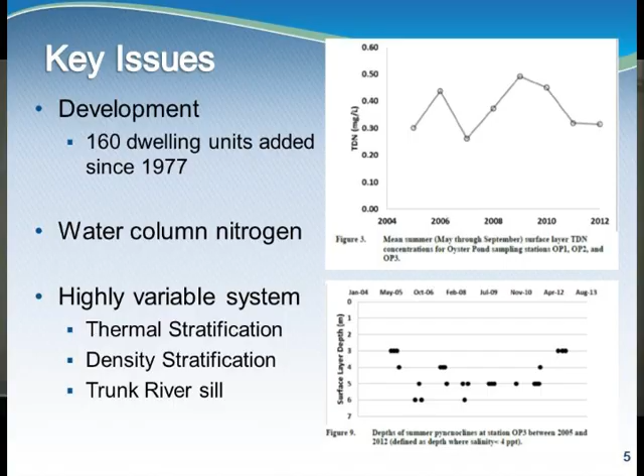Because it's occasionally backflooded by the ocean, it also stratifies by density. So you have a bottom layer that's got basically ocean water, then a diffuse layer that's brackish, and then something at the top that's less brackish. It varies quite a bit, from as shallow as 3 meters down to nothing, basically no stratification if it's shown at 6 meters. It'll go up and down through the seasons of the year, as a function of the environment, the temperatures, and the trunk river itself, which has a hydraulic impact on how water flows in and out of the pond. So it's not a typical estuary.

This is a figure from the needs assessment, and it shows the teardrop shape of the oyster pond watershed. That was established by the MEP, and it's essentially the groundwater recharge watershed. So what goes into the ground, generally within that area, is considered part of this watershed.

166 developed parcels, 225 dwelling units developed. That produces about 29,000 gallons a day of wastewater, which all makes its way eventually into the pond.

We worked with the planning department and the oyster pond working group to look at future flows based on development within undeveloped parcels in the watershed, and projected 19% growth over the planning horizon, through 2040. That increases the wastewater flow to almost 35,000 gallons a day in a do-nothing approach. So that'll make the problem worse.

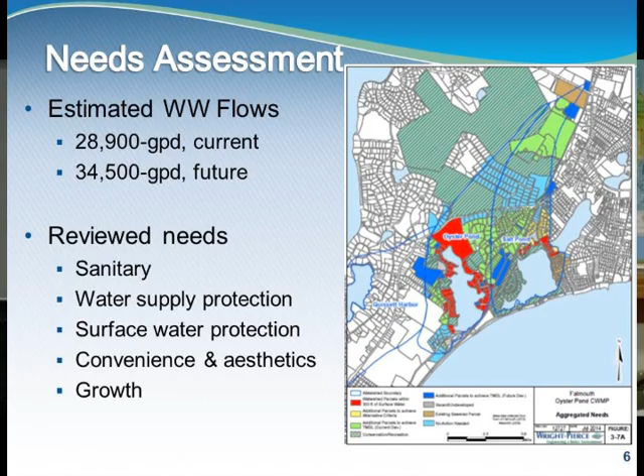We then reviewed the various needs in 5 categories. We look at sanitary needs, which is effluent bubbling out of the ground from leach fields that have failed. Water supply protection, are there any public or private water supplies in the area? Surface water protection from nutrient enrichment. Convenience and aesthetics, which are things like mounted systems or tight tanks. And then growth, as I mentioned previously.

The conclusion from that analysis was that the only real driver in this watershed is protection of surface water from nutrient enrichment. So that's what we focused on for alternatives.

The present load, as determined by the MEP, is 5.2 kilograms per day of nitrogen to the water body. That's based on data from 2001 to 2004, when the MEP collected all their data. It's broken down, and about 72% of that comes from septic systems, 28% comes from everything else: stormwater, fertilizers, land use, forested areas.

The TMDL is substantially lower than that, 1.44 kilograms per day. So there's an awful lot of nitrogen coming into the water body today that needs to be removed, and any growth that happens also needs to be removed because it's by definition greater than TMDL.

One of the keys to our approach was to make sure we addressed this problem holistically, not just focusing on the wastewater, but recognizing that we can still do something about the 28% that's coming from non-wastewater. To illustrate that, if you ignored the non-wastewater components, you'd have to remove 77% of the nitrogen to hit the TMDL. But we looked at different amounts of reasonable removal of the non-wastewater components.

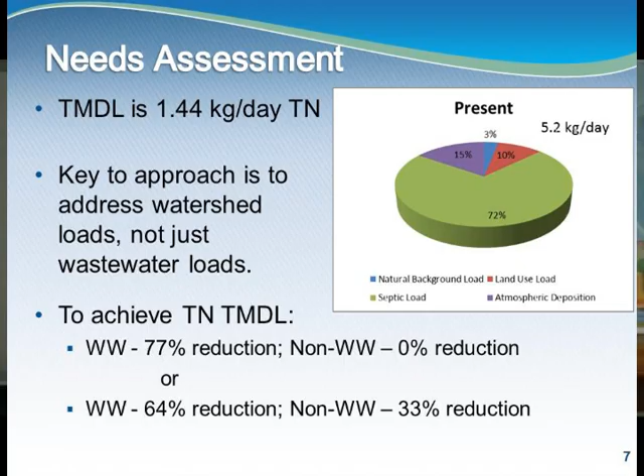In terms of alternatives, we identified 32 different technologies and approaches, or tools in the tool bag. We categorized them by non-structural or structural, something you would maybe legislate or recommend versus build. Source control versus remediation, which would be sewering a house because you're dealing with the source, versus a PRB, which is remediation.

It's already in the groundwater and you're cleaning it on its way through the system. We looked at on-site versus off-site treatment, your backyard system versus an off-site treatment plant, whether or not we address nitrogen or phosphorus or both. Phosphorus is also a driver because the pond acts a bit like a freshwater pond, so we have to be concerned about both nutrients in this case. And lastly, and most importantly, is whether or not the technology is currently DEP approved.

There's a lot of approaches being seriously considered right now on the Cape because of the significant costs associated with cleaning up the estuaries. But there are some things being considered more seriously than others, and some that have demonstration projects implemented, and others that are just being talked about. So we tried to have a sense for that as well.

So I'm going to go through each of the alternatives so people know what we looked at and why. Zoning modifications and growth management would be one way to deal with that growth, that 19% growth, and the cost that comes with it. The conclusion from the working group was recently passed flow neutral regulation, which was required to get DEP 0% financing, is sufficient for this watershed. So there may be opportunities for conservation easements in the watershed, but it's not something that's going to be required or incorporated directly into the plan.

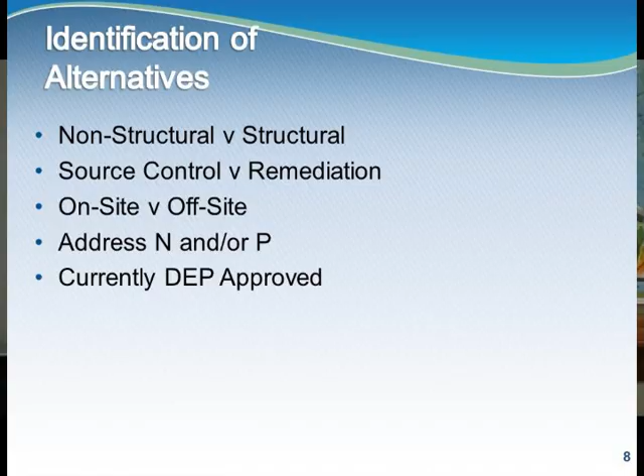Garbage grinders send excess nitrogen out to the septic system that doesn't really need to go there. Falmouth has a garbage grinder ban that's applicable to some elements of development, and the Board of Health is going to consider whether to expand that, to make that more prevalent for new construction and rehabilitation of systems. Septic system maintenance is another good thing to do to preserve the life of your system. It does not remove nitrogen. Pumping your septic tank doesn't remove nitrogen, but it does preserve the life of the system, and is, again, a good thing to do.

And then also there's a body of evidence suggesting that atmospheric sources of nitrogen have reduced fairly dramatically since the Clean Air Act was implemented in 1991. At that point, there were fairly uncontrolled discharges of all sorts of air emissions to the atmosphere. One of the unanticipated benefits that came out of that is nitrogen sources have been sort of polished out of the atmosphere as well. It's definitely one thing to keep track of. The town has asked the county commission to establish an atmospheric monitoring station on the Cape in order to really quantify this.

The projections are, it's been reduced 20 to 30% since the 90s, and there's another 20 or 30% expected based on additional refinements from air pollution control as well as mobile sources like cars. So this is an important thing that, again, doesn't involve infrastructure that we need to put in place here, but helps the long term.

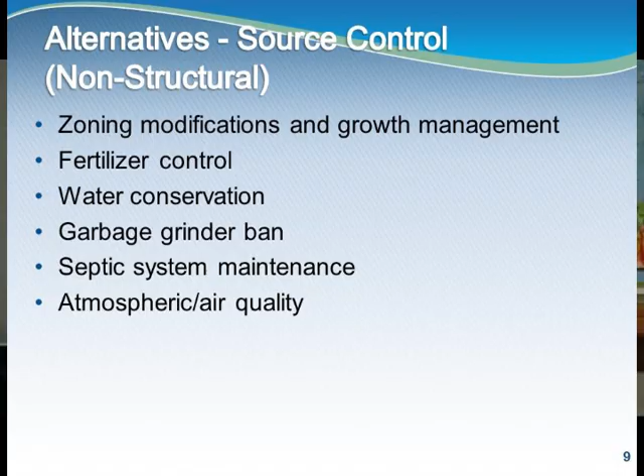From a structural perspective, source control, obviously we want to deal with stormwater and put BMPs, best management practices, in place. That's street cleaning, better catch basin systems, putting in rain gardens, things like that. And then looking at wastewater-related source control. As a part of this analysis, we looked at how we would collect wastewater, and concluded that a small, quote-unquote, small pipe system is the way to go, not conventional gravity sewers, wherever it's needed. We looked at various on-site methods, off-site, which I'll talk about in a bit, as well as effluent disposal.

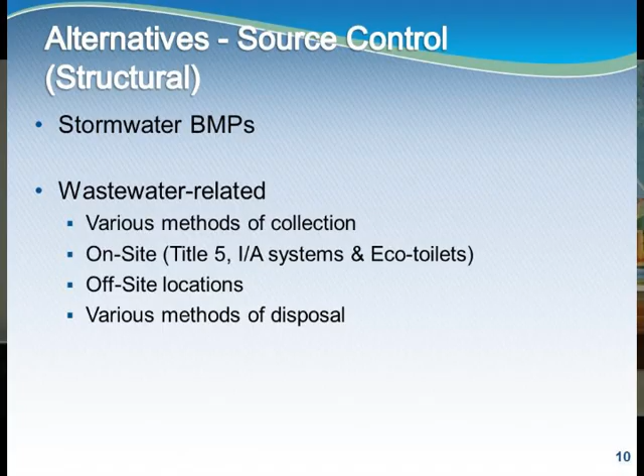So an on-site system, typical backyard system, what leaves the house is about 60 milligrams per liter of nitrogen. And a typical septic system will remove some amount of that nitrogen, 42%, typical, roughly. But in terms of what MEP cares about, the TMDL is based on the rest of the removal. That septic system is the baseline. So if you call a contractor and say, I want to put in an IA system, and they tell you they can remove 70% of the nitrogen, you need to ask, where am I dividing by? Because what we need to care about is how much better does it perform than a standard system.

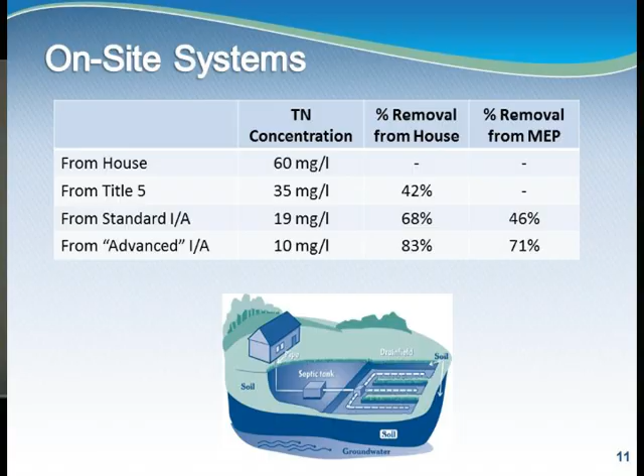So a traditional IA system, a denitrifying system on somebody's property, might remove 70% of the nitrogen from the house, but it's really only contributing 50% removal to our goal, to remove excess nitrogen. And obviously, if you can get a system that produces even better nitrogen removal, better effluent quality, then you're removing even more. IA stands for? Sorry, it's Innovative Alternative System. For Cape Cod, that basically means denitrifying septic system. Is it biologic or physical? Biological.

So we have off-site approaches that we've considered. One is that wastewater that needs to be collected would be sent to one of three places. One could be the Blacksmith Shop Road treatment plant that is built and operational in Falmouth, publicly owned. A second option would be Woods Hole Oceanographic right down the street.

The Quissett campus has its own private treatment plant for their own needs, but it's significantly closer and maybe an opportunity for public-private partnership. Both of those are outside the watershed, so those amount to 100% removal of nitrogen from anybody that's connected. And then the third alternative would be to build something small, a decentralized cluster satellite system in the watershed, and then dispose of the treated effluent in the watershed.

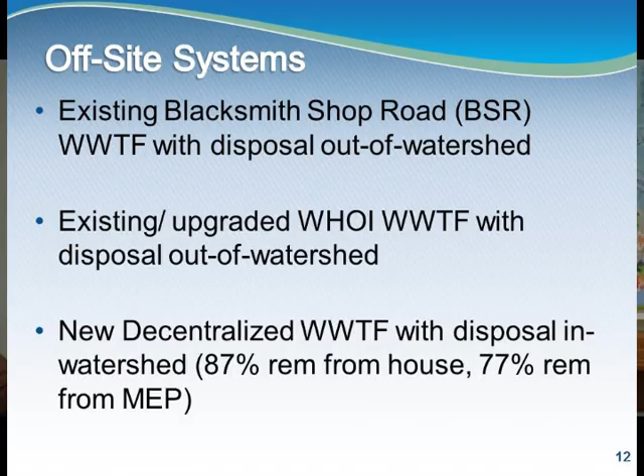This is a condo development on the North Shore in Hudson, Mass, 10,000 gallons a day. Everything's below grade in a little building. This is the Community of Jesus in Orleans. It's built inside something that looks a lot like the neighbor's house, probably. And then we're not considering something that looks like that. That's just to be clear.

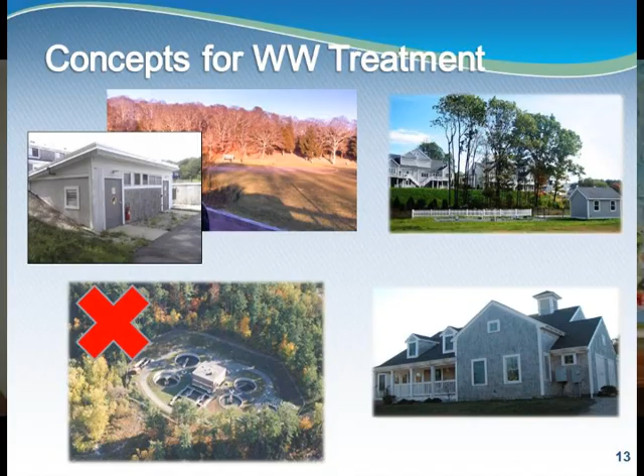By definition, if you're dealing with wastewater off-site, you have to find sites to put treatment or disposal or both. So we looked at aerial mapping and everything that was within 4,000 feet of the pond itself and said, what's not developed, what's publicly owned, privately owned. We came up with 10 locations that were suitable given the size needs. Of those, a couple we had to throw out because of environmental receptors. But there are some candidates, but obviously there are issues.

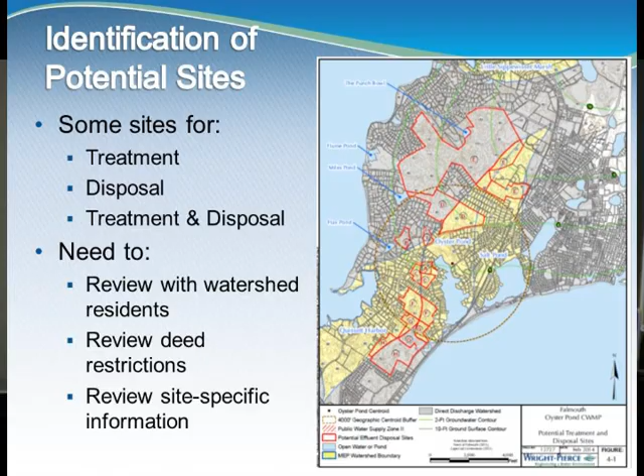They're not publicly owned in most cases, so there's some easement and negotiation issues that would have to happen. We would need site-specific information, we'd need to talk to those property owners and review deed restrictions in some cases to see if it's even feasible. So those are some potential issues related to sites. And another thing, we were very clear about what was on the table and what wasn't on the table in terms of effluent disposal.

So we're talking subsurface again, either something that's called drip dispersal, which is tubing, or subsurface leaching, which looks like the ball field at the Woods Hole facility, or something that's called a wick, which is about as big as this table, and it looks a lot like a manhole cover, not extensive, and it's definitely not open sand beds like you see in Hyannis. That is again not on the table at all for this watershed.

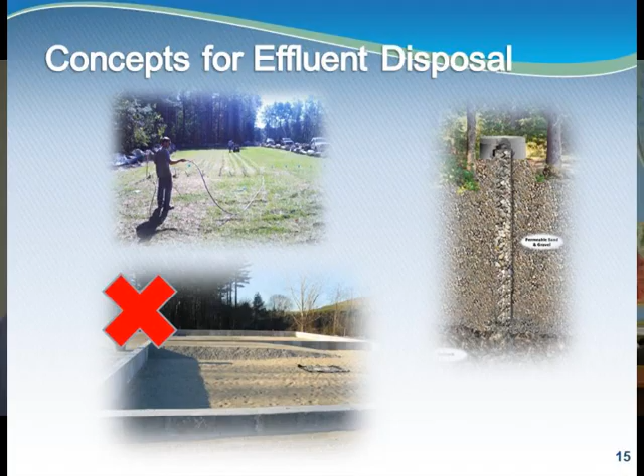We actually hit on most of these in your discussion in Q&A, but in terms of alternatives on the remediation side, so now we're not talking source control, we're talking cleaning it up once it's already in the environment. PRBs, we already talked about. Aquaculture is sort of the bigger name for either growing shellfish or growing algae, to use the nutrients as a food source and then take out the biomass, essentially. Shellfish isn't going to work in Oyster Pond because it's brackish, and algae growth.

I can ask it later. Okay. My question was basically, back in the 1700s, that water was able to sustain oysters. What would be wrong with bringing it back so that it could? I'll come back to that, because that's like one of the next ones, and it actually is the next one here.

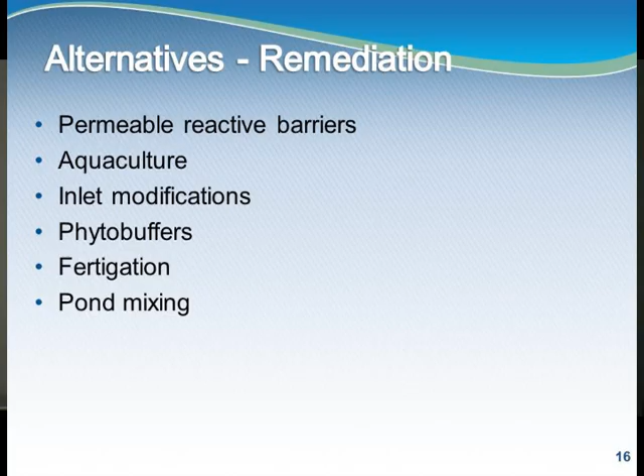So algae is one of the, I mentioned that there are some things that DEP is seriously considering as alternatives and demonstration projects, and some that they're probably not really considering seriously. And I would put algae aquaculture in that category. So the commission and DEP are developing what's called the 208 plan update right now, which you may have heard about. It's due to be published at some point in the fall, and will speak probably specifically as to whether that's a viable alternative here or anywhere.

Which commission, and then, like the DEP, is that the state or federal? DEP is state, Massachusetts DEP. There's EPA, which is the U.S. Environmental Protection Agency, that's federal. Massachusetts DEP is the state department that's in charge of environmental quality. And then there's the Cape Cod Commission, who does a lot of things, but one of their charges is to deal with the 208 plan, regional wastewater management,

discussions, and nitrogen management. And the fourth entity would be MEPA, which is the Massachusetts Environmental Policy Act office, that is sort of the environmental clearinghouse for any proposed project, whether it's a shopping mall or wastewater infrastructure.

So shellfishing wouldn't work here because it's brackish. Inlet modifications is something that's being done in town, on the south coast, Bourne's Pond, right? So it's opening up a water body to better tidal communication, so it flushes much more frequently. It's not something that we considered here because this pond has been managed as a brackish pond for, I guess, 12, 15 years.

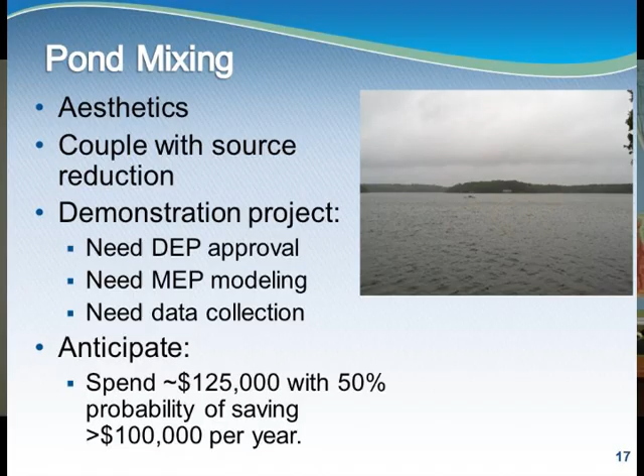So this mixer is solar powered. It's basically a propeller. It's like an old-fashioned wall fan, except horizontal, like a ceiling fan, that pulls water up from the bottom from a pretty discrete interval of the pond, and it's above that stratified layer, and it pulls from only about an 18 to 24 inch zone. It brings it up the column, spreads it across the top, and it just circulates this way.

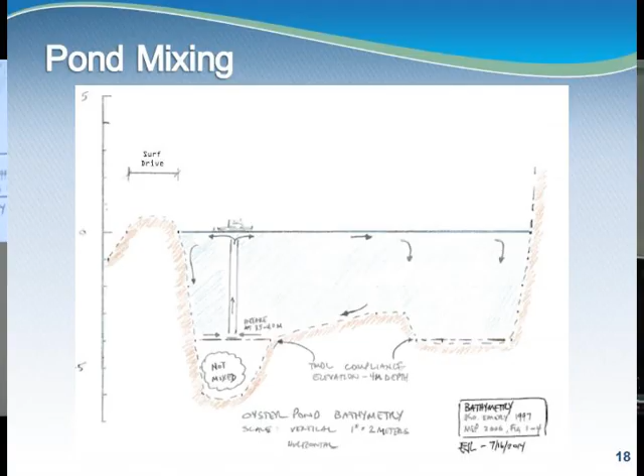We know the pond is well mixed horizontally, but we also know that it's not well mixed vertically. So we're not talking about a lot of mixers, we're talking about one, pulling from a fairly discrete area at the bottom, and the goal of it is to keep the stratification below the compliance elevation, which is what's defined in the TMDL. Okay.

So we have some baseline alternatives and some baseline measures and alternative measures. The baseline are the ones that are going to be part of every plan, and it's all the non-structural source controls, periodic maintenance, dredging of the trunk river itself, and then stormwater best management practices.

Alternatives are things that we may consider based on further discussion and analysis. Those are changing water quality criteria, implementing pond mixing, modifying what we call pond compliance elevation, that's dealing with the dynamic fluctuation of the stratification layer, whether or not it makes sense to implement fertigation or phytobuffers, and whether or not it makes sense to establish a watershed district to help manage the costs and manage water quality. So the may consider items are for future discussion.

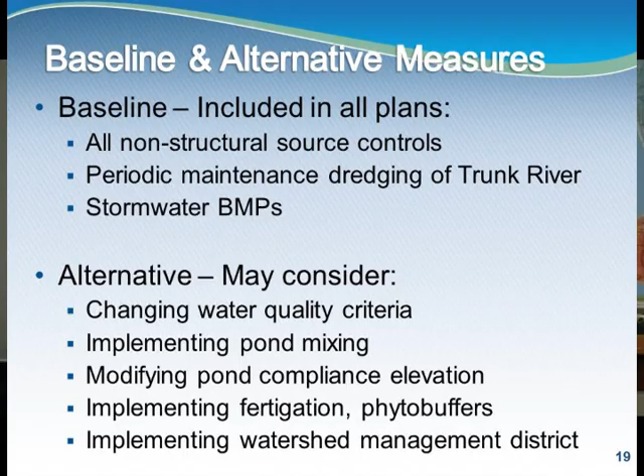So we're taking the baseline measures, the alternative measures, and we came up with 6 what we call composite plans, which looks at how to address compliance at the planning horizon with the TMDL. So these include growth. And they range from sewering to the Blacksmith Shop Road treatment plant to no action.

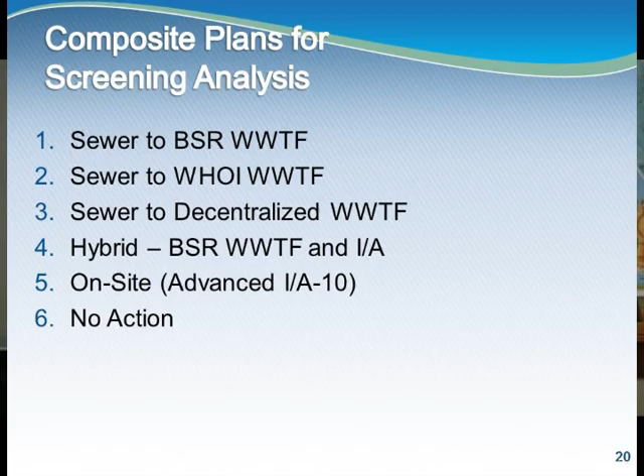So, Plan 1 is to sewer 70% of the dwelling units, send that out of the watershed to Blacksmith Shop Road. So the 70% is of the future developed dwelling units, okay? So that would meet the TMDL, which is nitrogen. It would produce significant phosphorus removal, which is an important characteristic here. It reduces freshwater recharge to the pond a little bit, not a lot, 4%. It would send about 26,000 gallons per day to the Blacksmith Shop Road treatment plant.

One of the big issues here is whether or not that plant actually has capacity. And that's something that I don't believe will be known until some point next year. And it's related to the permit and EPA and its discharge, West Falmouth Harbor discharge capacity. Yep. Okay.

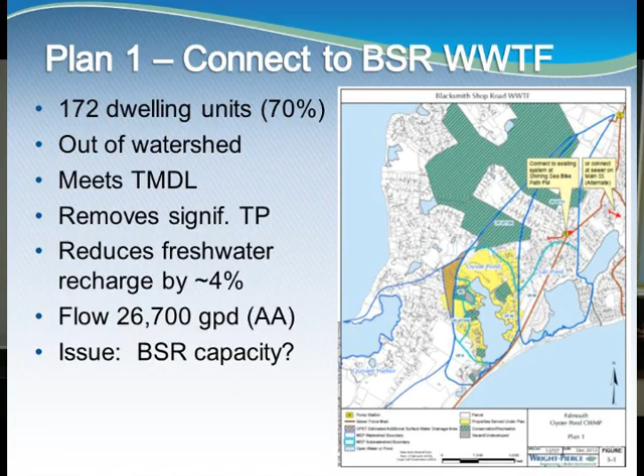Plan 2 is pretty similar, except that instead of going to North Falmouth, we're going to go down the street to the Woods Hole treatment facility. Because we're taking wastewater out of the watershed, it meets the TMDL, same amount of phosphorus, same amount of freshwater recharge reduction. But we know WHOI's not super interested in this idea because they have their own growth plans long-term. So public-private partnerships are a lot like pushing rope, so maybe that could happen.

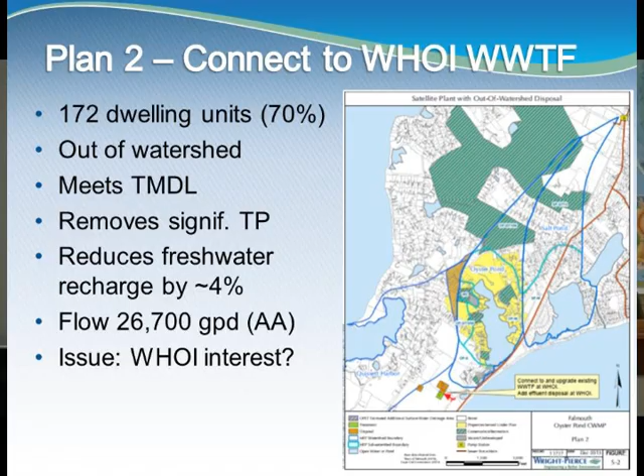Plan 3 would be to build the low-profile, fitting in the neighborhood type small treatment plant in the watershed, and then disposing of that in the watershed. It would be 87% of the dwelling units in the watershed. It would meet the TMDL. It would remove significant phosphorus. No change in freshwater recharge because you're putting it all back in the same place. And then the question would be, where of the 8 remaining places do you put it? What fits in best? Whose neighbors are louder than the other people's neighbors? So there'd be lots of fun associated with that.

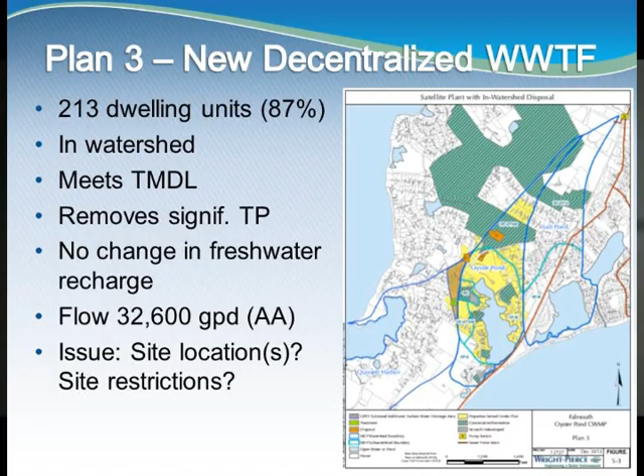Plan 4 is a hybrid plan, and this came about from comments and discussions at the June Water Quality Management Committee meeting. So this is different if you were there last time. So this is sewering properties at the north end of the pond and sending that to Blacksmith Shop Road. And then letting, over time, the rest of these homes in the watershed convert to IA systems based on building permits or system failure, Board of Health type permitting.

So it would impact 94% of the homes in the watershed. 112 would be sewered, 117 would be IA systems over time. It meets the TMDL, removes a little less phosphorus, a little less freshwater recharge change, takes less capacity wherever you send it, and it's got the same issue with Blacksmith Shop Road.

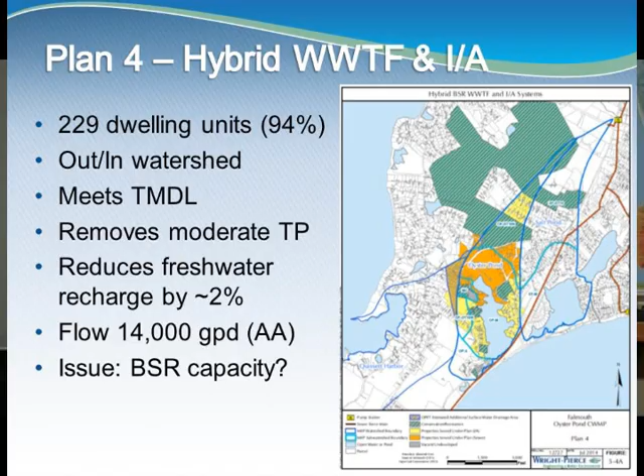So Plan 5 is not a hybrid plan, it's all on site. So everybody addresses nitrogen in their own way on their own property. This would impact 94% of the homes in the watershed. And the reason is that Oyster Pond South doesn't contribute to water quality in the pond, based on MEP's modeling.

So it's an in-watershed, meets the TMDL, no change in freshwater recharge. The bigger issue is the math doesn't work if you get past the planning horizon. You have to then change course and take water out of the watershed, 2040 and out. So it might make more important conservation restrictions or conservation easements at some point in the future.

And then systems that DEP would approve that meet 10 or less, there's a fairly limited set of options. So you're not talking 10 different manufacturers you could buy something from, you might be down to 2. So there are issues there. I expect over time that will change as this topic matures on Cape Cod.

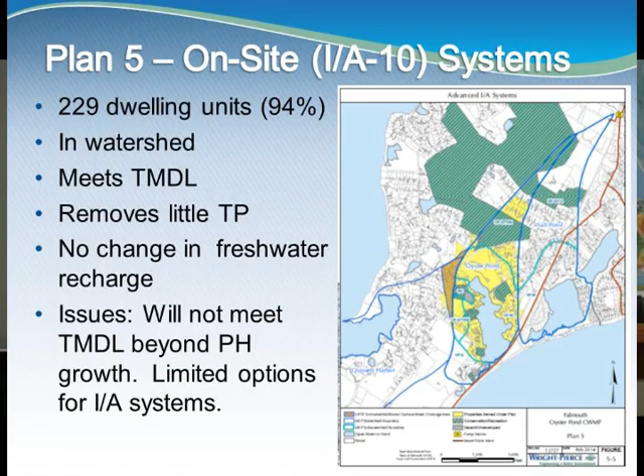Plan 6 is no action, and it doesn't do a lot. But one thing that's interesting though, if people don't think about this all the time, is that there's still a cost associated with that, because people are pumping their septic systems, and whether or not you budget $900 a year to replace your system in 20 years or not, that's an actual cost. Most people just write the check or get a loan or something when it happens, but there's a cost associated with that.

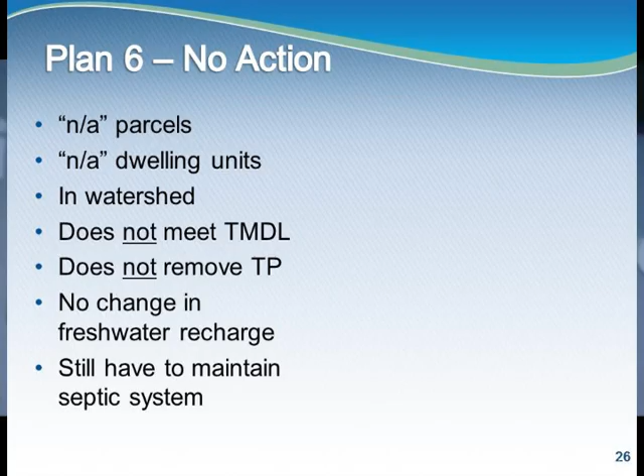Principal differences: all the plans except the no action plan meet the TMDL. Some of the plans involve sewers, some don't. Some remove wastewater from the watershed, others don't. And some of them remove significant phosphorus, whereas others remove only a little or none. So those are all kind of things that might tip the balance.

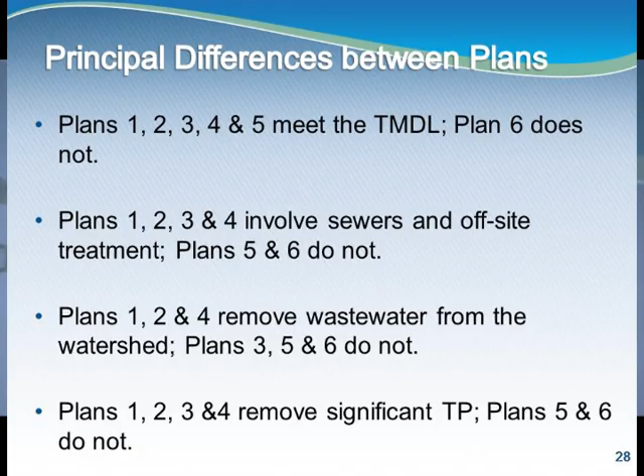We developed costs for each of these 6 options, and we did that by coming up with conceptual layouts, where would sewers go, how many, and doing the nitrogen budget. How much do we have to go get from a property, from a dwelling unit parcel perspective, for current and future conditions. We use capital and O&M costs from the Barnstable County Cost Report, which the Cape Cod Commission published in 2010, for treatment plant costs and I/A system costs.

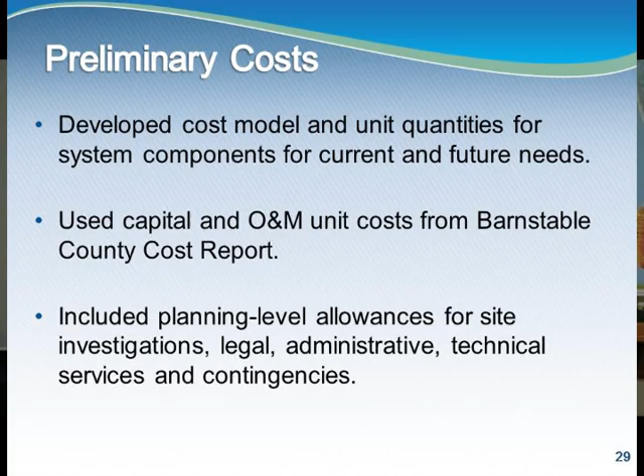We developed some other costs for things that aren't in that report, like sewer systems, pipes, the cost for effluent disposal. We developed those ourselves based on experience. And then we included allowances for the things that are part of every project, legal, technical, administrative, site investigations to find appropriate sites.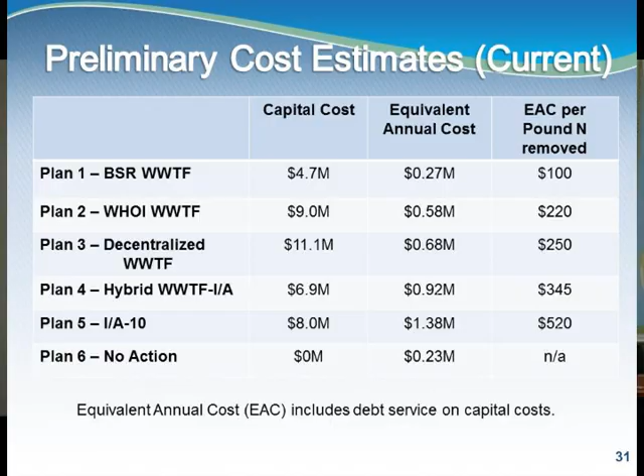As a way to assess how much O&M impacts the capital cost, we included an equivalent annual cost. So the equivalent annual cost includes the O&M, what you have to pay for to pump the system, electricity, what your sewer bill might be, and it includes debt service on any loan. What's O&M? Operation and maintenance. Sorry.

So if the town were to secure a loan for a public project, it has already been approved for 0% financing for 30 years. So that's obviously going to produce a much lower payment than a loan you might get from a bank down the street, which might be at 4 or 5%, probably the longest would be 20 years. So there's some elements there that go into the equivalent annual cost. And these are watershed-based costs.

So to illustrate the difference between planning horizon and growth and current, I did the same thing, but took out the future growth. So you could see what it might be if you did everything today for just today. And that drops the numbers a fair amount, from 4.7 to just over 11 million. So there's a substantial cost associated with growth, and that cost varies by plan.

So the next steps: obviously we're having this meeting, we want to hear as much as you have to say about this, and then the working group will reconvene and decide what we do with the comments, how we incorporate it, who we reach out to, whether we have additional model runs done by MEP. And then at some point we would get into developing the recommended plan, which is a lot of work in and of itself.

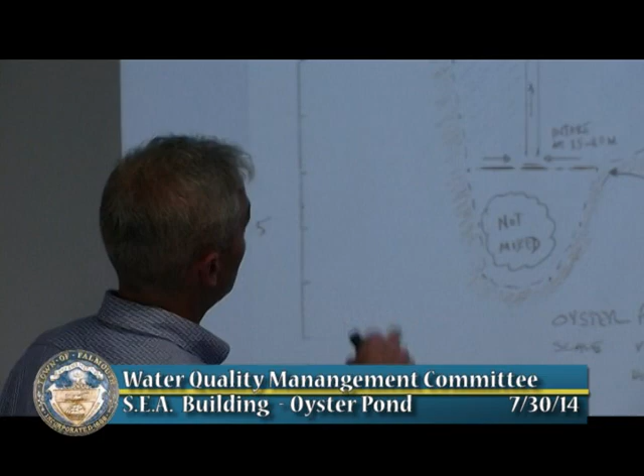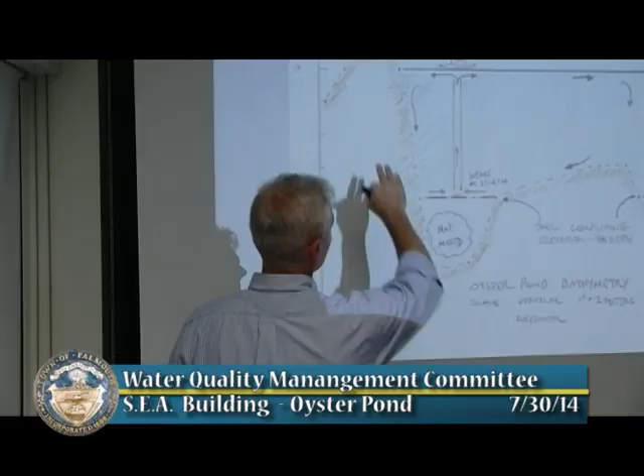We have a good slide that shows the weir, but I can go back to that. So the weir is at the south end of the pond, and it controls - it sets to hold a certain water surface elevation in the pond and to keep the ocean water out, except on really high tides and storms. So it's over here, and it's designed to keep the amount of ocean water that comes into the pond to a minimum.

In terms of what the pond is like, I don't know - it seems to me that's been happening for an awfully long time, probably thousands of years. So finding a way to manage water quality without going too far, too extreme, I guess - there's obviously excess nitrogen input into the water. My gut feeling is that the TMDL is pretty conservative. I think that managing it the way it is, as a brackish system, is fine if that's what the watershed wants. It seems to be something DEP's accepted by default, if nothing else. I don't think they would be opposed to changing it, but that might be a big fight too.

I don't know. Sure. My name is Rob King. I live in treetops on the edge of the pond. Before I get to my question, the alewives might have a problem if you change the pond into a saltwater pond.

My question is different. I'd like to know, in the modeling and the estimation of the solutions, if anything is done to refine the term household, because we obviously have a lot of households around this pond that are occupied at most 2 months out of a year, which is 1/6 of a year. They are a lot different than a household occupied 12 months of the year. Is that taken into account anywhere, or is it best on a planning basis to simply say a household is a household is a household?